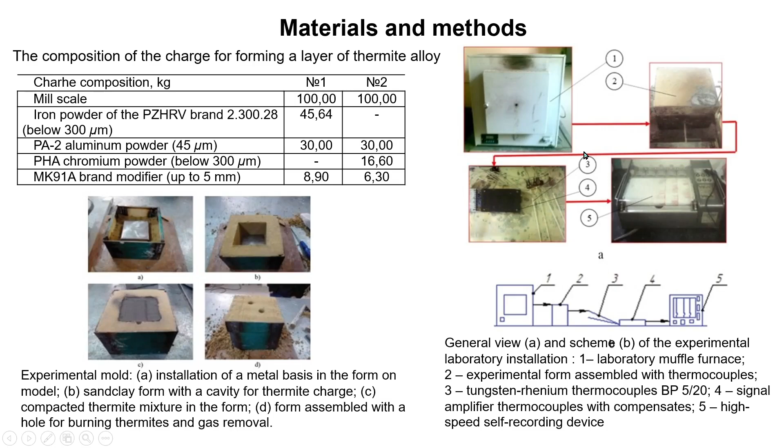In reality, to accelerate the heating time of the mold with direct contact of the open surface with the heated atmosphere, a mold with an open metal base in the lower part was made. The base, lower part, open space.

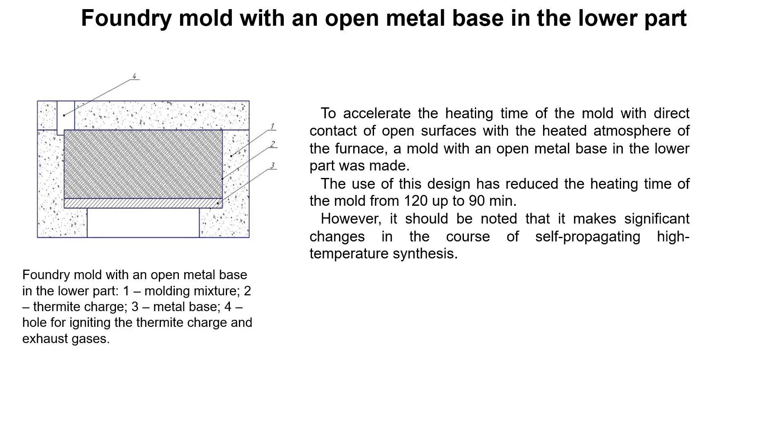The use of this design has reduced the heating time of the mold from 120 to 90 minutes. However, it should be noted that it makes significant changes in the course of self-propagating high-temperature synthesis. After initiating the combustion of the thermite charge, 0.5 minutes from the beginning of the process, there is a sharp decrease in the temperature of the lower surface of the metal base.

Analysis of thermocouples installed on the upper surface of the metal base, curve 2, showed that the total combustion time of the thermite charge is 8.5 seconds, where the combustion front reaches the surface of the metal base and the temperature for 1 second rapidly increases to 2054 kelvins, which indicates the beginning of the thermite alloy formation.

The process of thermite burning takes place at the temperature of 3200 kelvins, which exceeds the boiling point of iron. This in turn allows you to add metal filler to the charge in such volume that the temperature of the melt to form a functional layer was not less than 2474 kelvins. It's curve 4.

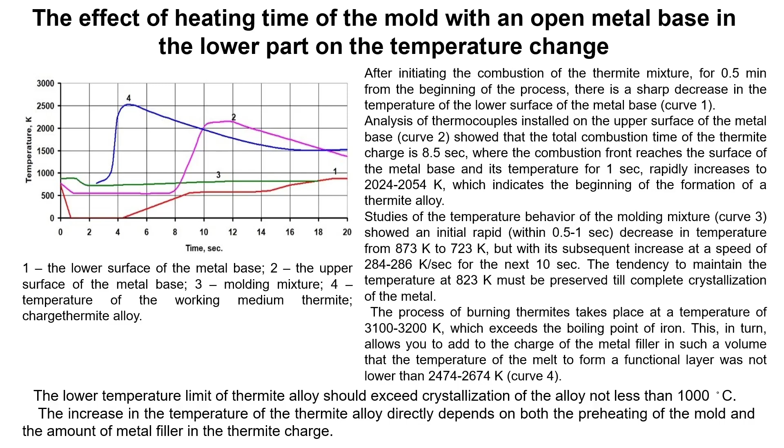The increase in the temperature of the thermite alloy directly depends on both the preheating of the mold and the amount of the metal filler in the thermite charge.

Thus, as a result of the process, samples of thermite alloy are obtained, on the surface of which, when the mold is heated to 873 kelvin, in the slag phase, metal inclusions of a spherical shape are formed. This is due to the rapid stage of combustion accompanied by intense spraying of the resulting synthesis metal.

The results of the study of adding 40% of the metal filler to the thermite charge are presented in figure 2. Without heating, 473 kelvins, 673 kelvins, 873 kelvins, the best examples.

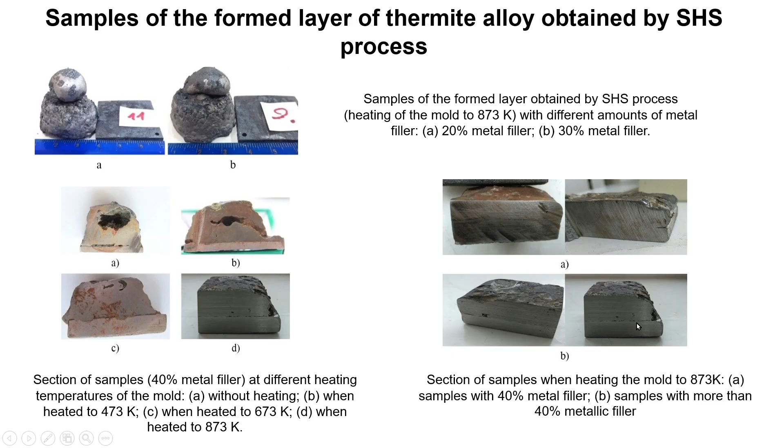In metallographic studies of the formation zone of the thermite alloy layer with the metal base at a mold heating temperature below 473 kelvins, there was a loose connection of layers with the base. There were slag inclusions. In the upper part, there were shrinkage shells.

For samples obtained by heating the mold to 873 kelvins, the liquid state of the thermite alloy was longer. The time to crystallization was 16 seconds. The surface of the metal base melted. And the slag, consisting of corundum, emerged from the zone of functional layer formation.

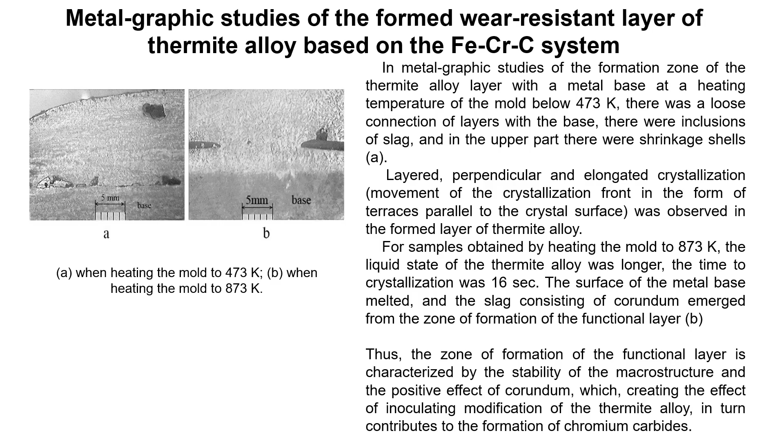Thus, the zone of formation of the functional layer is characterized by stability of the macrostructure and the positive effect of corundum, creating the effect of inoculating modification for the thermite alloy, which in turn contributes to the formation of chromium carbides.

The obtained samples were investigated for such properties as density, porosity, and yield of alloy. It is shown that increasing the amount of metal filler in the charge from 20 to 40% when heating the mold to 873 Kelvin increases the yield of suitable thermite alloy to 71.9% by weight of the original charge.

It increases the density to 7.05 kg per meter cube and reduces the porosity of the formed thermite alloy to 5.5%.

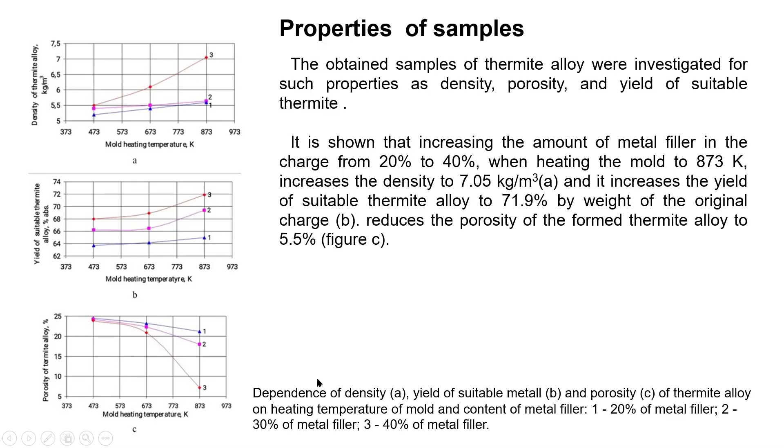So, the technology of forming a thermite alloy layer based on the ferrum-chromium-carbon system on the metal by the self-propagating high-temperature synthesis process is offered, which allows to obtain a cast functional layer with improved physical, mechanical and operational properties.

It is shown that the increase in the amount of the metal filler from 20 to 40% in the mold heated up to 873 Kelvin affects the properties of the formed layer of thermite alloy, increases the density of the alloy by 33% and decreases its porosity by 17%, while the yield of suitable thermite alloy increases to 74 absolute percent.

It should be noted that lowering the heating temperature of the mold below 873 Kelvin degrades the quality of the formed thermite alloy layer; it doesn't separate from the slag and is released into separate spherical formations.